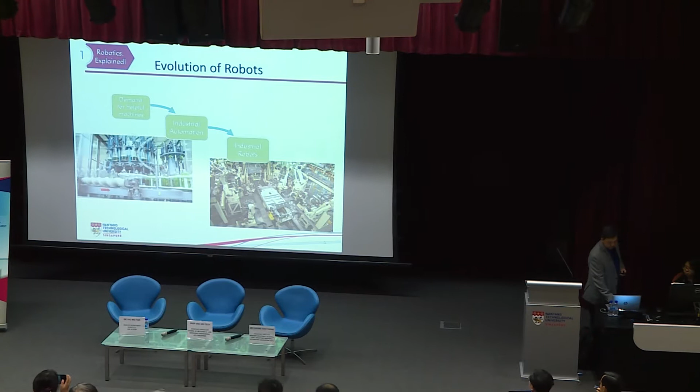First is the demand for helpful machines. We need that, and then we have industrial automation. We build machines, and that leads to industrial automation. As we progress, we think hard manufacturing isn't good enough, we need flexible manufacturing. And there we go, we have robots building cars. So that's in earlier years.

As we go on, the spin-off from industrial robots will be service robots. One type of service robot is field robots. Field robots include robots that go underwater, on land, in the sky, and into space. These are what we call field robots.

Service robots also mean medical robots. Anything outside of the manufacturing floor, we call service robots. So medical robots - we have robots for surgery, and robots to do rehabilitation for, say, stroke patients.

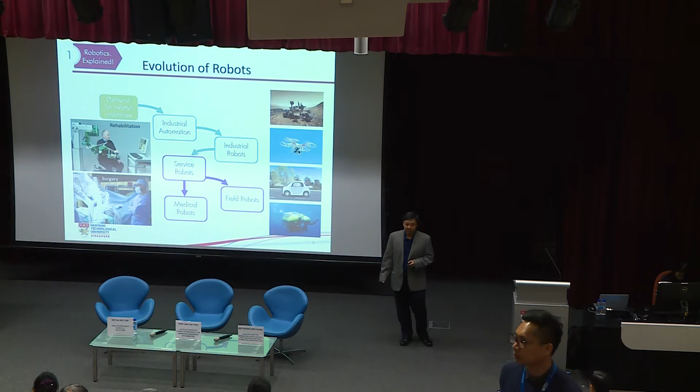We also have social and domestic robots. For example, robots for social interaction, for the elderly, for dementia - more therapeutic kinds of interaction. We also have robots for entertainment, robots for education, so more social. And in the domestic space, we have robots for cleaning, sweeping your floor, for delivery, and robots for cooking. These are all coming into our lives now.

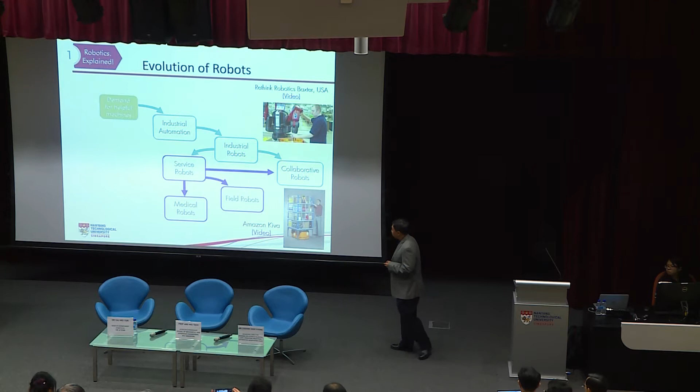As this progresses, the merger of service robots and industrial robots gives rise to a breed of robots called collaborative robots, or cobots for short. It's been a buzzword in the past few years - I'm not sure if you've heard of it. So what is a cobot? Cobots are robots used mainly for industrial applications, but they allow people to work alongside the robot. In the olden days, industrial robots were heavy and powerful, so they were always caged up, and people weren't allowed into the robot's boundary for safety. Cobots, on the other hand, are designed to work alongside human beings. There are several features that allow this.

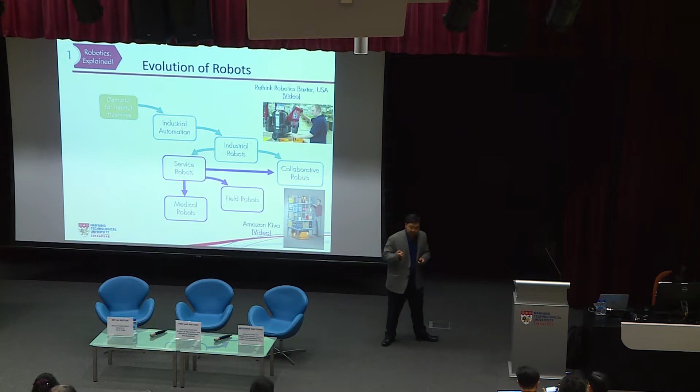Let's take a look at two robots here. Let me bring us to YouTube.

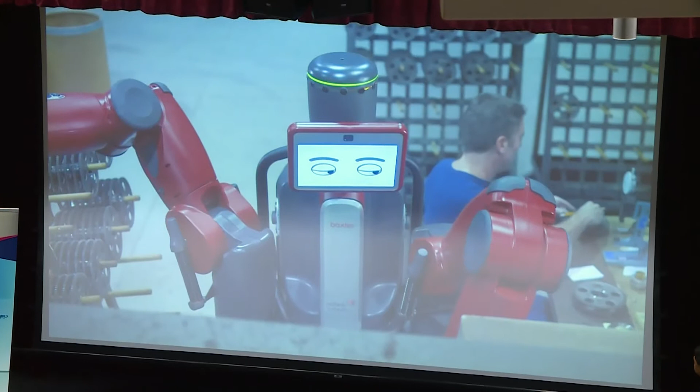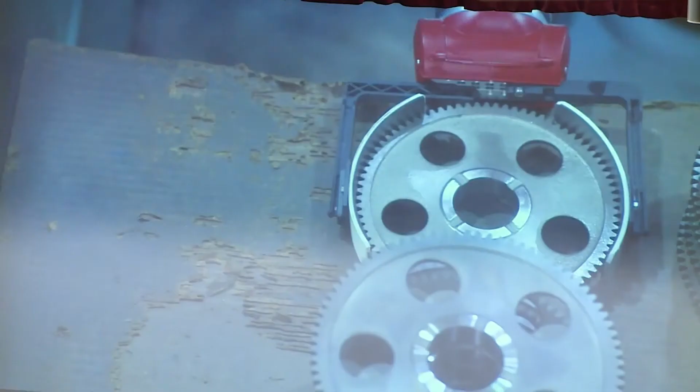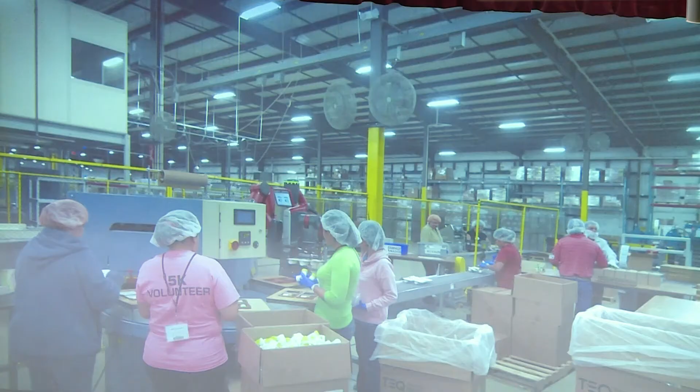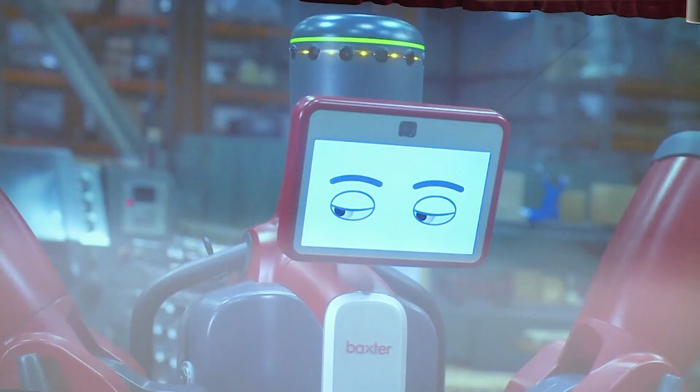Think adding automation to your production line limits you to high cost, high volume, caged robots. Think automation requires specialized robots programmed by highly trained engineers. Well, think again. Baxter breaks out from the protective cages that contain many manufacturing robots, allowing people and robots to work side by side, doing what each does best. From machine tending to line loading to packing and unpacking, Baxter has the flexibility to be deployed and redeployed on tasks with minimal setup or integration cost. Whether there's increased customer demand or the introduction of a new product, Baxter helps you create a collaborative workforce, one with increased productivity and efficiency. Think about getting all this for a base price of $25,000 - that translates into an ROI of months, not years. Now think about what Baxter could add to your plant. Rethink manufacturing. Rethink what's next. Rethink robotics.

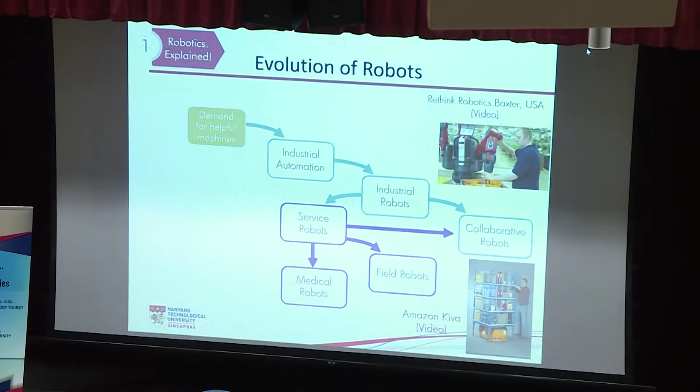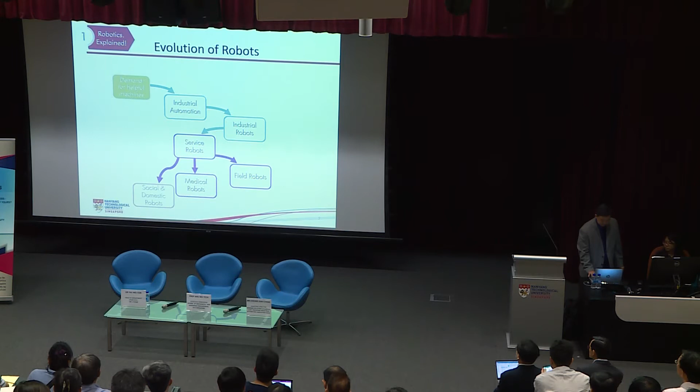We better go back first, if not this thing will rerun again. Right, so, am I still on?

So that's one type of collaborative robot. It allows the robot to work alongside a human being. The main design feature is that the joint is no longer hard - hard meaning that when it hits someone, the full force of the power gets transmitted from the robot to the person. But the joints of cobots are usually variable, meaning the joint can become soft the moment it touches a human being, so contact with the robot is no longer harmful. That's one big characteristic of a cobot.

So there's another type of cobot, one with no arms.

On the ranking of things to worry about, Skynet coming and taking over doesn't even rank in the top 10. It distracts attention from more urgent things, like what's going to happen to jobs.

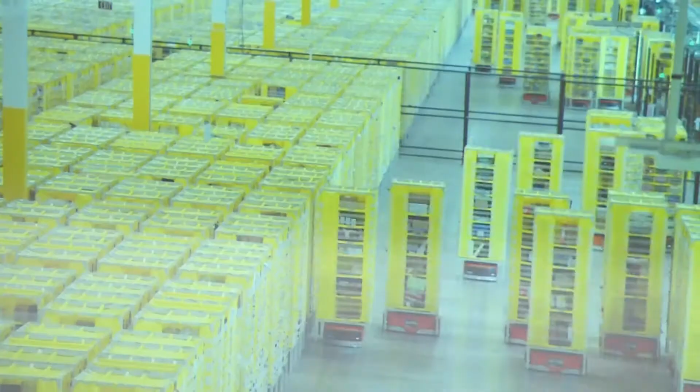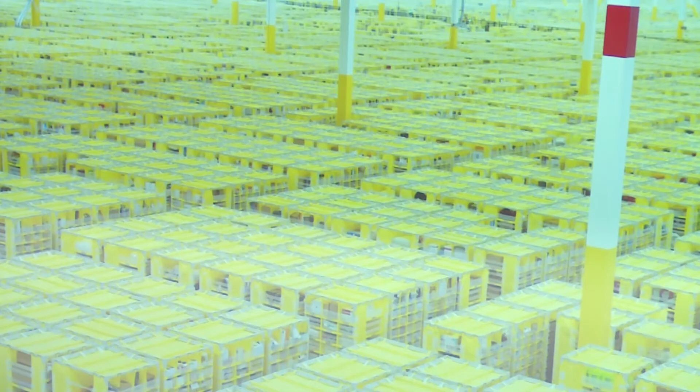For a glimpse into the future, consider one of the largest companies on the planet, Amazon. Amazon has tremendous scale. We have fulfillment centers as large as 1.25 million square feet, like 23 football fields, with millions of products. To deal with that scale, Amazon has built an army of robots.

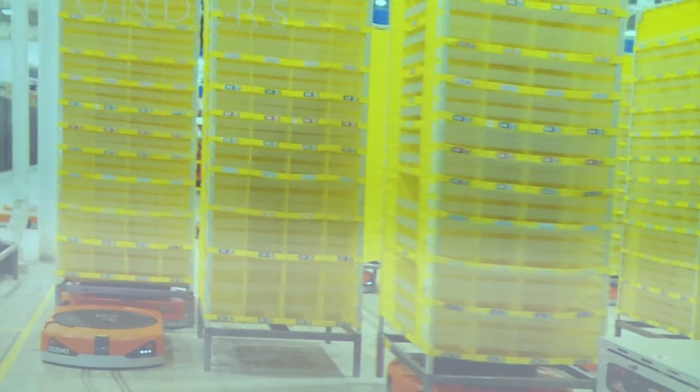Like a marching army of ants that can constantly change its goals based on the situation at hand. Our robotics are very adaptive and reactive in order to extend human capability and allow for more efficiencies within our own buildings. And there's plenty more where those came from.

Every day, this facility in Boston graduates a new batch of machines. You get the idea?

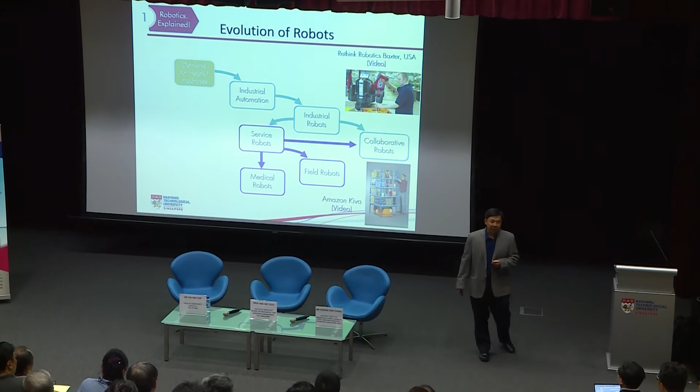In fact, Amazon did not build the Kiva system. They purchased it from a startup company for $775 million, so that they can take the technology off the market, so that they are the only people that can use this technology.

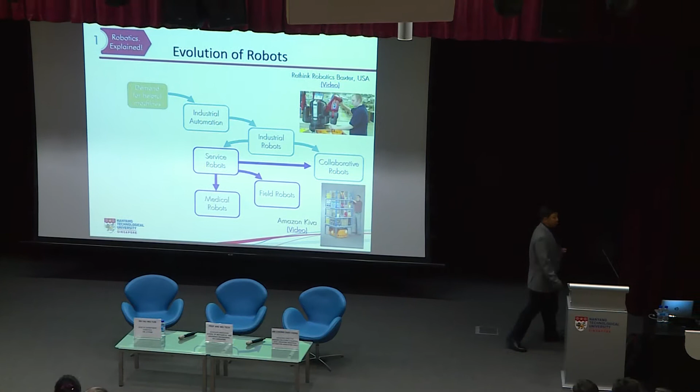So you can see, robot work alongside human beings. So that's cobots. There's another track of development that's also from the human desire to replicate nature.

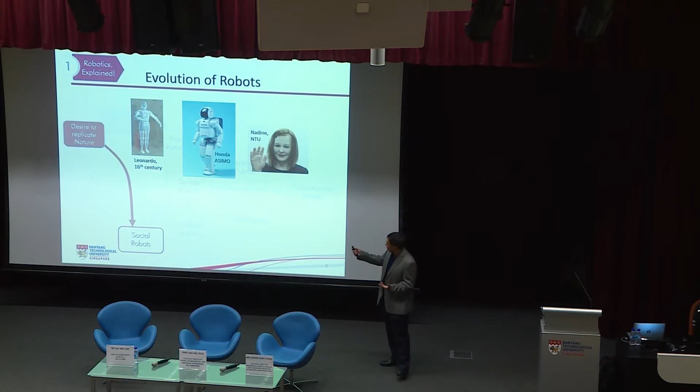Leonardo da Vinci built a robot-like thing. Honda was the first one to build a successful Asimo. And then we have our own NTU invention here, Nadine, which is a humanoid robot aimed for being a receptionist. We also try to mimic nature: flying machines, ants, Big Dog by Boston Dynamics.

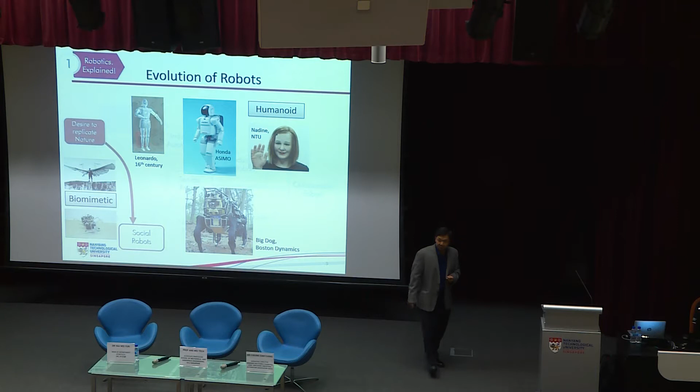Right, so this would be the development of robots. The recent development, the latest one, is this thing called bots. So no longer is the robot in a physical form.

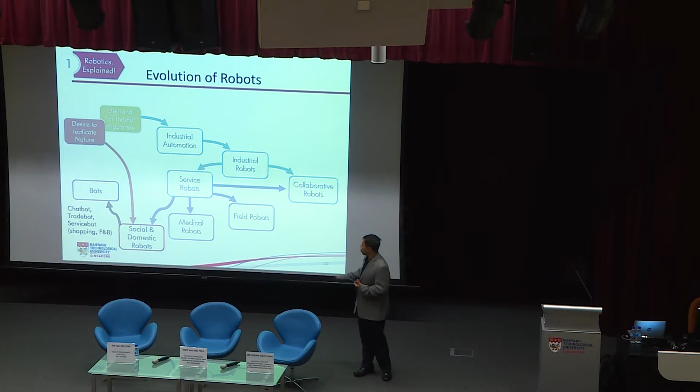People think that a bot is a software robot, on the internet, a software system that's intelligent enough to chat with you, to trade. Trade bots can trade faster than any human trader, at a million times the speed of a human trader. So for very quick trading, people use trade bots. Service bots for shopping, for F&B. So these are all robots.

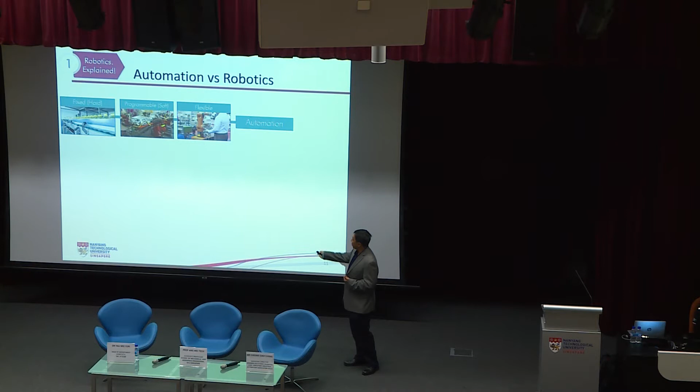So then you ask, what is the difference between automation and robotics? In a traditional sense, this is fixed or hard automation, programmable automation, and then with cobots we have flexible automation. On the other hand, this is industrial robot, this is collaborative robot, this is service robot, this is social robot. In fact, we call this robotics.

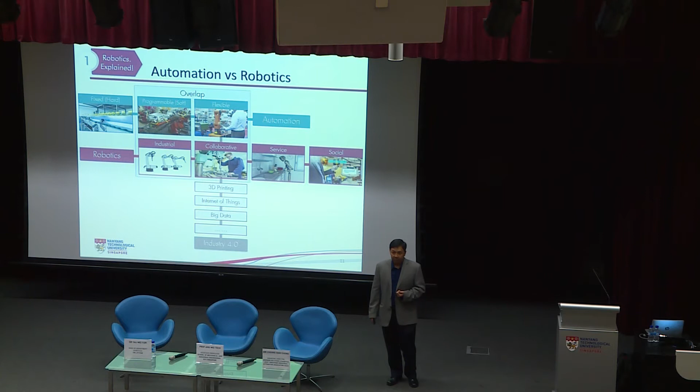In fact, this is the overlap—these are equivalent, and these are equivalent. And on this axis, if we add 3D printing, Internet of Things, big data, and integrate them together, it's the whole concept of Industry 4.0. This talk is not about Industry 4.0, but robotics is part of Industry 4.0.

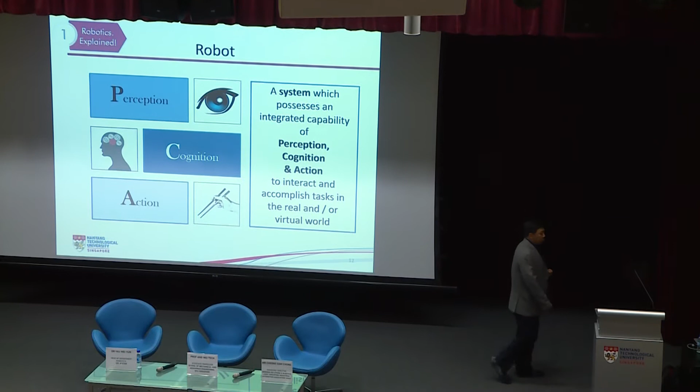How do we define a robot? Because now software can be a robot, right? A robot is a system which possesses an integrated capability of three things: perception, cognition, action. You get information in, cognition means you try to understand—you interpret the data, you make a decision, and after that you take action—to interact and accomplish tasks in the real world or the virtual world.

So we have broadened the definition of what a robotic system is all about. As long as it possesses the three components here—perception, cognition, and action—in general, we can classify that as robotics technology.

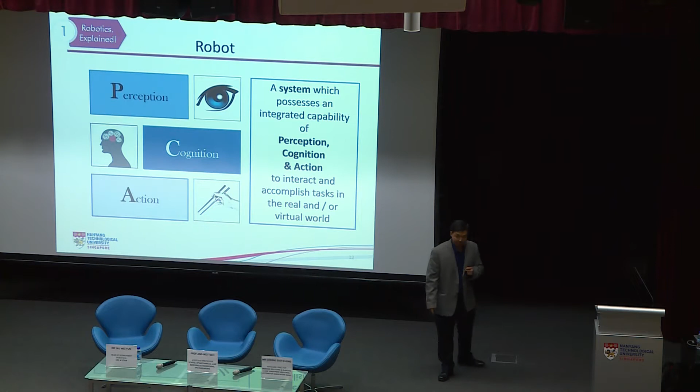So we zoom in a little bit more. Perception: sensors, how to use different sensors, computer vision, how to use sensing. The sensors means the hardware, sensing means the software. You make sense of the sensing data.

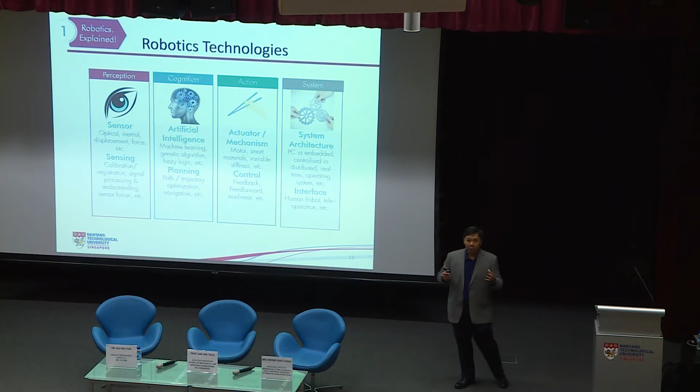Artificial intelligence, machine learning, genetic algorithms, fuzzy logic—all these things are the buzzword right now, AI, to make decisions. Planning, actuators, different types of smart mechanisms, smart materials. How do you do control and put everything together? How do you design the system to be robust? The interface between human and robot is what makes cobots possible. So these are the building blocks of robotics technology.

Before we go on, I wish to spend some time talking about artificial intelligence, AI. This is basically the idea that robots and AI are going to take over the world. So let's zoom in on what AI is. AI is, by definition, intelligence demonstrated by machines, as simple as that. But what exactly is it? So can I ask the audience about intelligence—human intelligence—can I poll the audience?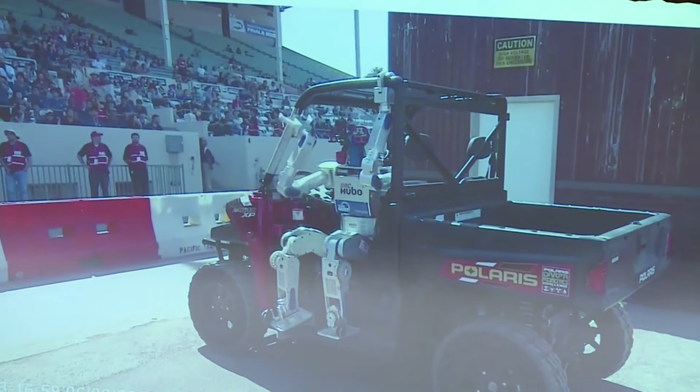Let's see what they did. The robot's supposed to get into the car and drive it to the destination. All these tasks are told to them, but the size of the car, what route to drive, are not told, so they must make the decision to do the driving.

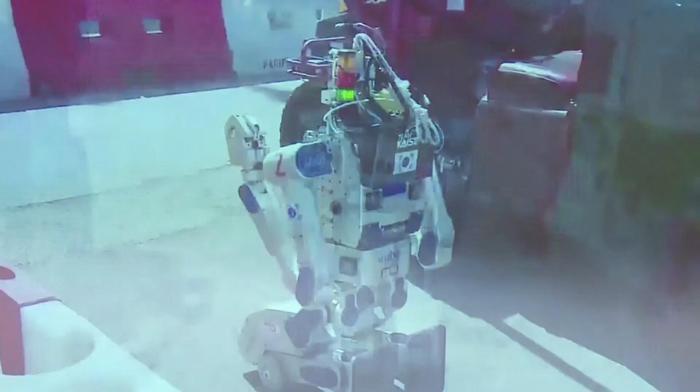Get out of the car, kneel down - not to pray, but it's easier to move on wheels. They're supposed to look for the door, look for the handle, using computer vision to detect where it is, then open it, manipulate it, and go in.

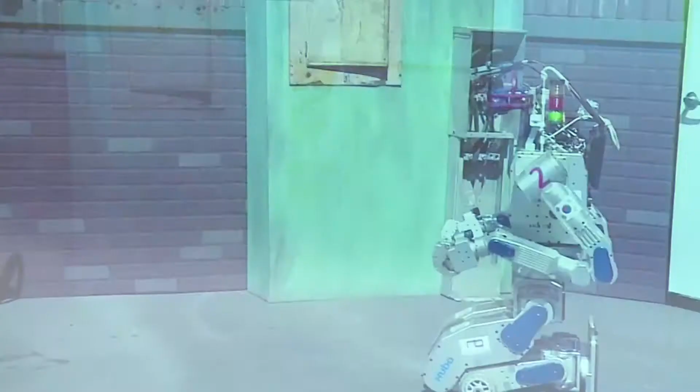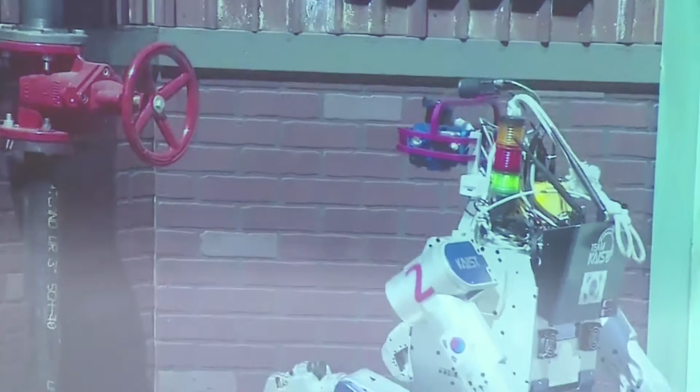Then they must find the first task: find this red valve, turn the wheel automatically. They must find the task - the task is given to them, but where it is, the height, the sequence, is not told to them. The robot must make decisions on the spot.

Find the right tool - it takes a long time to decide. Pick the right one. Not sure why it does that - regrip again. This is planning, they are doing planning now, so that it can grasp the thing correctly.

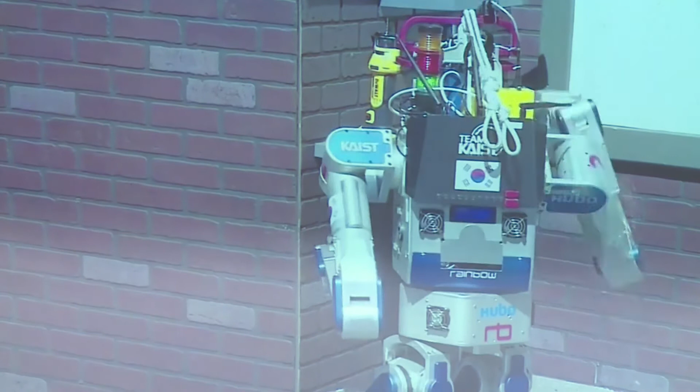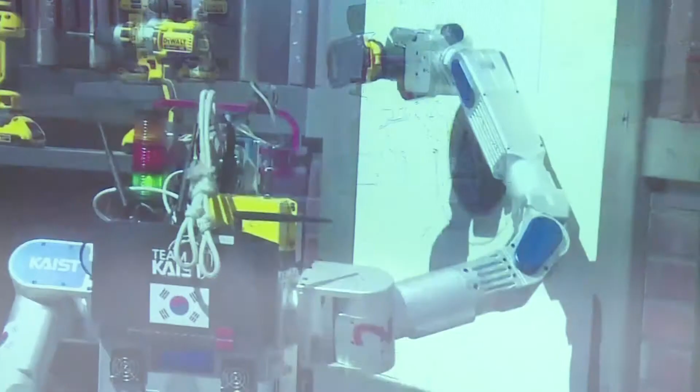Find the target - it's looking for the target now, sensing the depth. Turn on the drill or the saw, then cut out the circle. See that the circle is really round - rounder than any of us can do. All right, done.

Next one: to pull the cord out from one socket. It's looking for the right way to approach - it gets somewhat lost trying to find its way. Find the target task, raise to the height. This is, I think, 4 times the speed or something like that. Pull out the cord.

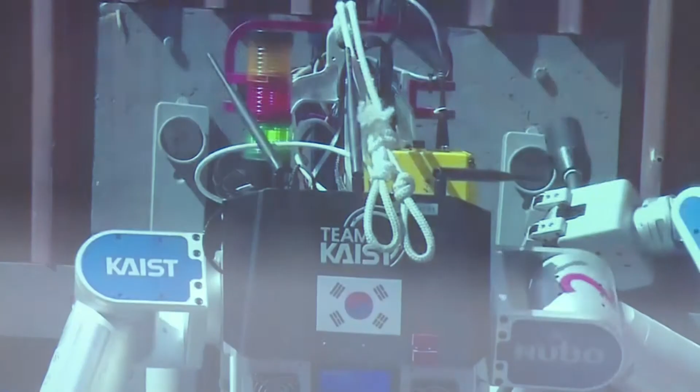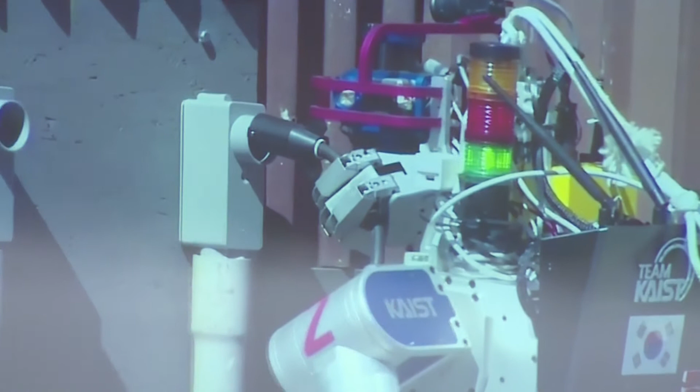The task here is really hard because the cord is flexible - this is manipulating a flexible, deformable object, which is really difficult. It adjusts, tries again - cannot, because it's flexible. It gets lucky, pushes the thing in. Done.

Other groups say that they are cheating. They're supposed to take the other path to walk over.

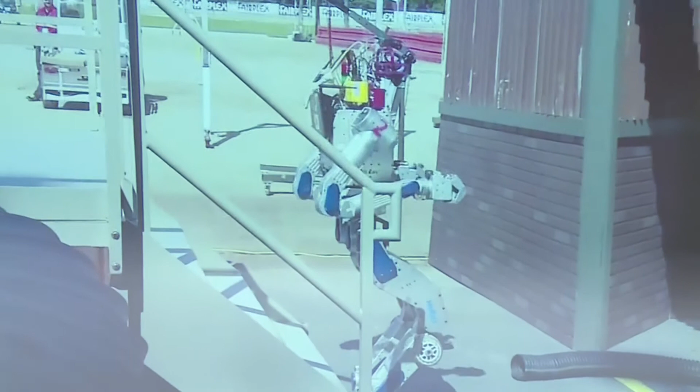All right, coming to the end, push away the obstacle. Come to the stairs. See, this robot is designed to be no front and no back. It doesn't matter front and back. So it's doing planning now, adjusting itself, doing planning, how high, calculate the dynamics of how to approach the stairs.

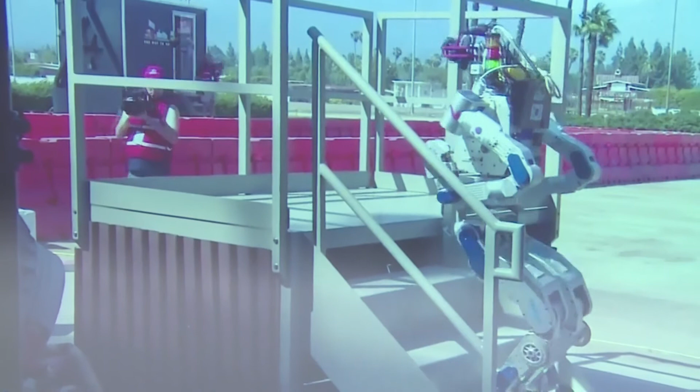All right, and then go up. And once you've taken the first step, it knows the parameters. The rest are easier. And voila, it finishes. It's the only one in that year that accomplished everything. So that's why they won.

One month after the competition was held, the magazine called Popular Science declared that the DARPA Robot Challenge was a bust, was no good at all, that it was a waste of time. So let's see why.

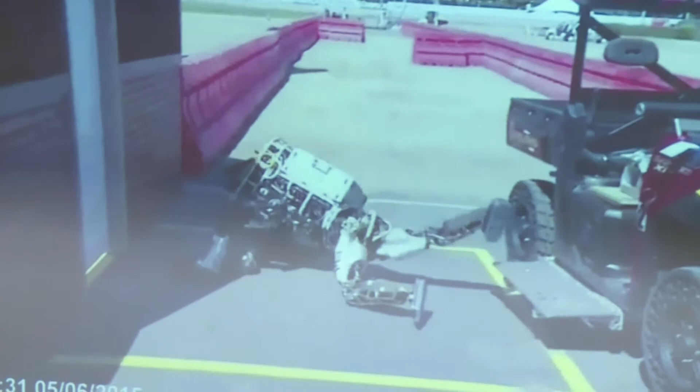Not too good, right? Not too good at all. You say that it's busted. That's 2015. That's what the best in the world can offer.

Hubo, why did Hubo win the competition? It's not because Hubo, in terms of robotics engineering, was the best. Hubo won because the KAIST team behind it adopted the best strategy, right? I was there in Korea playing with Hubo, with Professor Oh, the team that built this thing.

That day, they did a demo, the robot kept falling down. One of the sensors was out of calibration, right? It kept falling down, couldn't take even one step. So the technology is not that robust.

And why did they win? Because all the major decision making was done by the team behind. The rule allows them, I think, 100 bit per second kind of communication. They can send a simple signal over to the robot to guide it.

And the CMU team, the red robot that fell down, spent 10 minutes looking for the door handle that day because it was too bright. The vision algorithm was not tuned to that brightness. So the robot spent 10 minutes looking for the door handle.

But Hubo was simple. The team behind it said the door handle is there, go there. All right, so immediately the robot made a decision. The decision, remember, between the obstacles, to bash through or walk through, the team behind made the decision for the robot. It's too unsafe to walk through, let's just bash it through. So it was the strategy behind it that won the day for them.

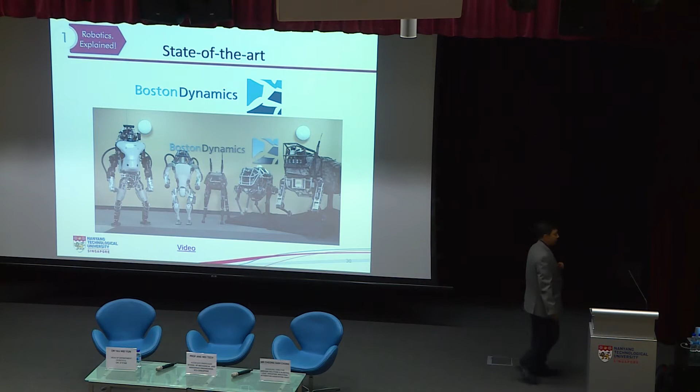All right, so that's 2015. Let's fast forward a little bit to see what the best can offer now, in 2018. Boston Dynamics.

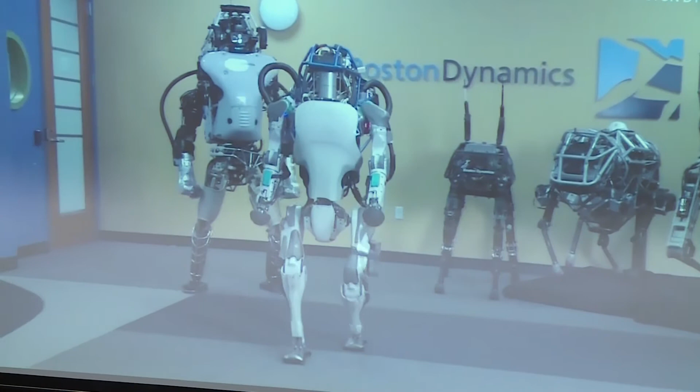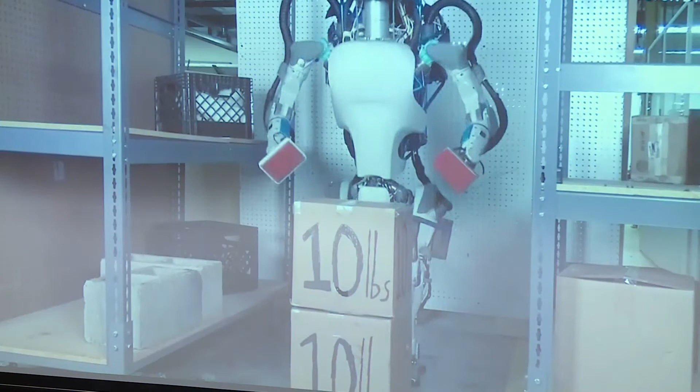Here are some of the terrifying robots from Boston Dynamics. This is Atlas. Boston Dynamics calls Atlas the world's most dynamic humanoid robot, and from the looks of it, they're absolutely right. Atlas is a bipedal robot capable of running, jumping, doing backflips, and keeping its balance like no other bipedal bot we've seen before. Its control system coordinates the motion of its arms, torso, and legs, allowing it to perform human-like tasks and achieve whole body manipulation.

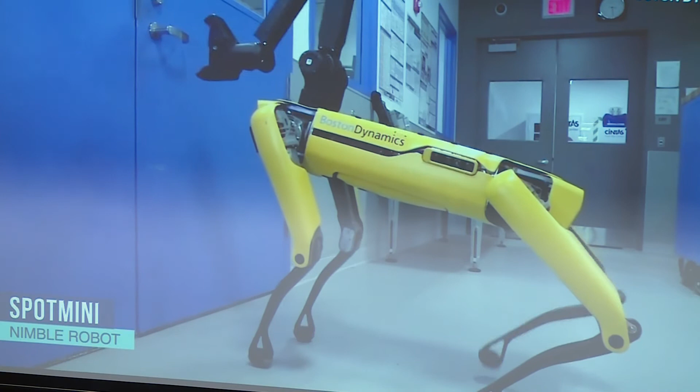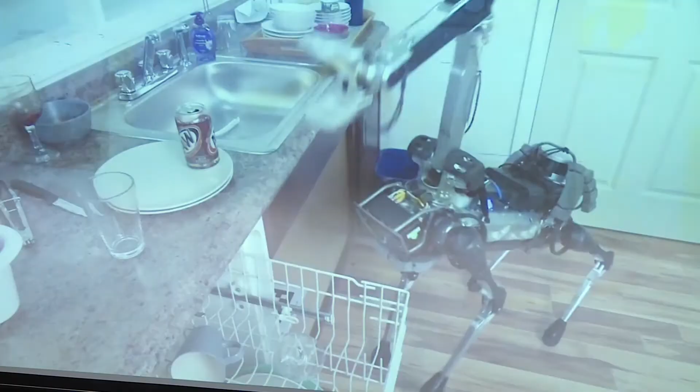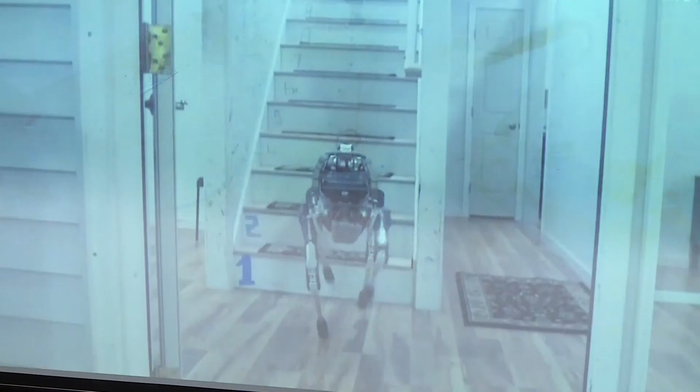Spot Mini is a dog-like robot that is small enough for domestic use. Its arm, which looks like a mini brontosaurus's head, can pick up and handle objects around the home. Spot Mini is 100% electrical, making it the quietest robot Boston Dynamics engineers have built to date.

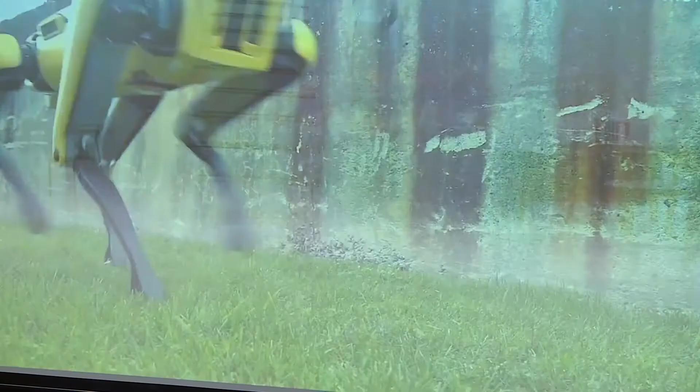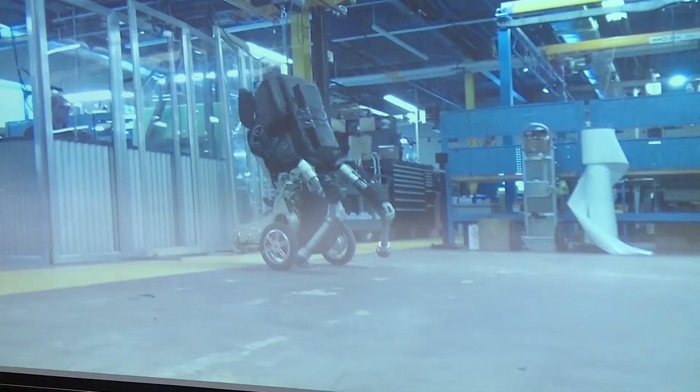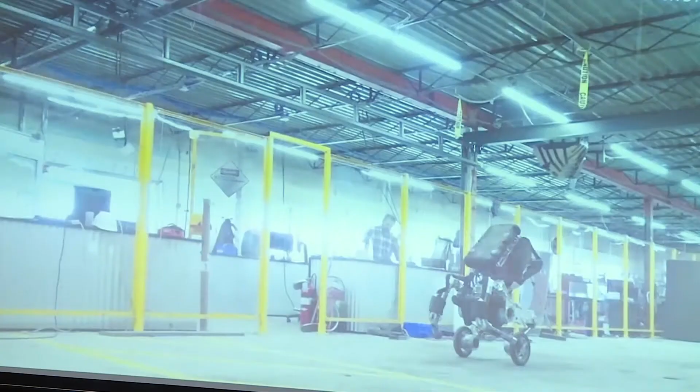Handle gets around on 2 legs and 2 wheels. It's a very agile and high-strength robot. Its wheels allow for high speeds and quick movements. It has the ability to jump over and even use objects like a table as a platform or track as it glides on its wheels, maintaining its balance. Handle's grips are great for picking up heavy objects and moving them around. Handle uses its handles for balance, as demonstrated here in this endpoint control demonstration.

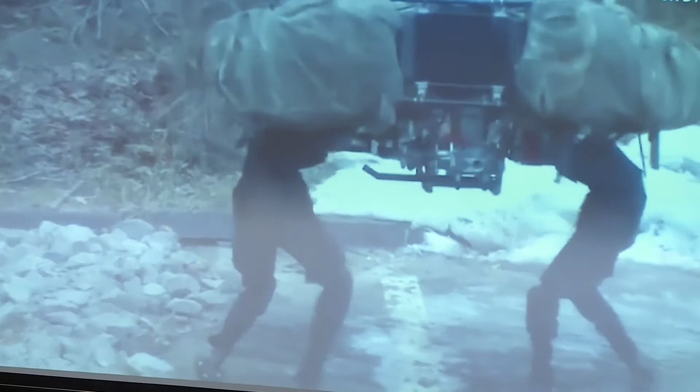Big Dog was one of Boston Dynamics' first advanced terrain robots and was the first legged robot to venture outside the lab, taking on some real-world conditions. It was designed to perform well in different environments. It can carry up to 150 kilograms and can climb slopes up to 35 degrees. Big Dog was developed for the military, who passed on the rugged robot because it was too loud.

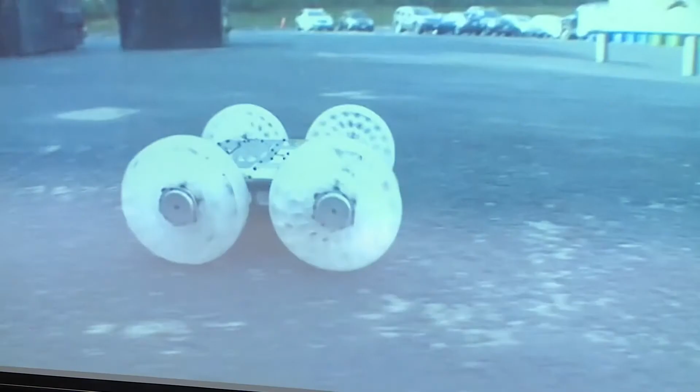Sand Flea is like a small RC car. Don't be fooled by its small stature though. Sand Flea can jump 10 meters into the air. It can literally leap onto the rooftop of a building, landing softly. Think of it as a high-end RC car.

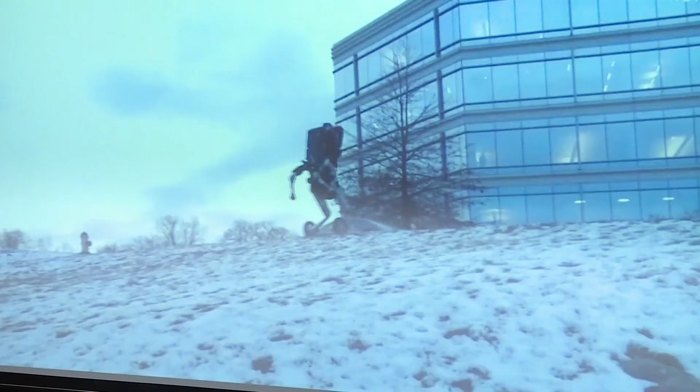Don't worry, it's okay. I think it's okay. Is it too loud, the video? Don't worry, I don't think I have many more videos.

So you see that capability in terms of control has been enhanced, definitely better than any of those robots that we've seen in 2015. It's amazing, right? A robot can do all these things, but all these are well-rehearsed tasks. The robot picks up something 10 times, perhaps the success rate is maybe less than half. All these are for video production. It's not that robust yet.

Boston Dynamics was purchased by Google in 2013 at an undisclosed sum, with markets saying probably around 800 million. But Alphabet, Google, sold it to SoftBank last year, said to be around 600 million, at a loss of 200 million. Why? Because none of this technology can be monetized. How do you make money out of all these things? The thing is very good for show, right? Capability-wise, it's marvelous, but to make it robust for the real world with AI behind is still a long way to go. So what it demonstrated is that we have done very good control in terms of dynamics. We do the calculation well, and we are there already.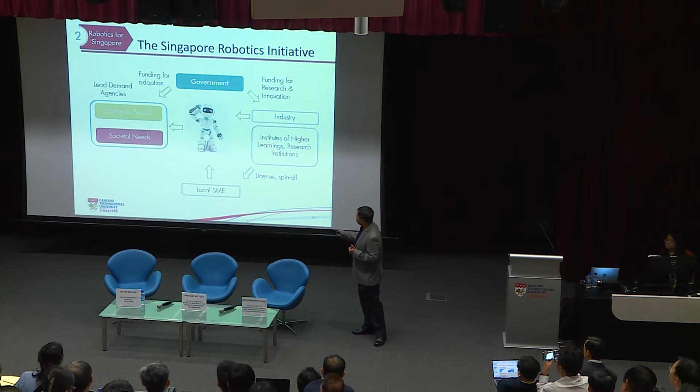Maybe they can license this and make the local SME stronger, provide a solution to fulfill these needs. The government, on the other hand, can fund adoption by lead demand agencies - government agencies, like hospitals facing a manpower crunch.

Let the hospital adopt locally produced solutions - I give you money to adopt. SMEs say, now government guarantees my business when I invest in this, so let me invest, because SME cash flow is very tight. With guaranteed sales, I invest, I license this, I build this, government pays for the bill, and after this is tested and trialed, they give me money and feedback to make it better and stronger.

So if we pick the solutions correctly, Singapore has national needs, and at the same time, these needs are ahead of other countries. If we can do so, in time to come we can export these solutions, level up our SME with capability that leads the world, and solve our national needs. It's a very good strategy.

Don't you think so? It's very sound. This is the same thing we do when we have needs - our water needs. We created NEWater, we created water technology, and now our water technology leads the world. So this is the same template we embark on for this solution.

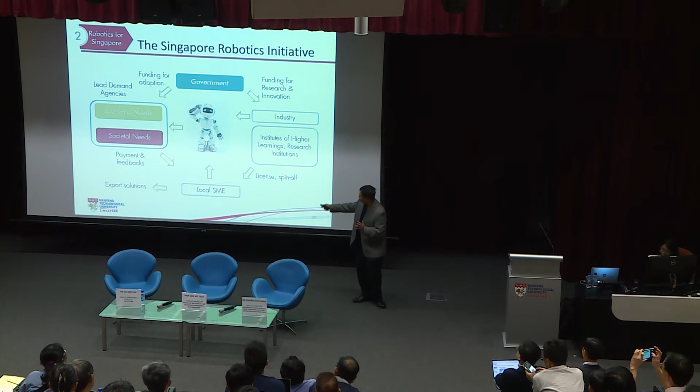In order for us to fulfill what we described here, the government came up with 3 strategies. The first one: develop class-leading technology and research capability. Research performers are the IHLs, research institutions, and Singapore-based companies - we develop world-class technology.

Then, lead demand-driven: we use LTA to drive the use of autonomous cars, hospitals to drive the use of hospital logistic robots. Lead demand drives the development of robotic solutions. Technology is custom-built into solutions and delivered here.

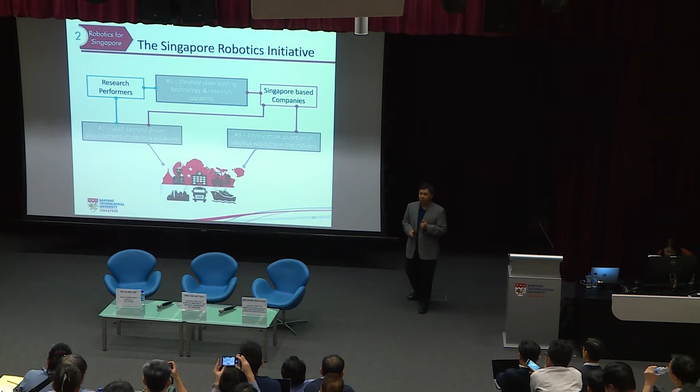And then they fund the industry to adopt the solutions. Three-pronged strategy: develop technology, build technology into applications targeting the needs, and then fund people to adopt. Again, this is a sound strategy.

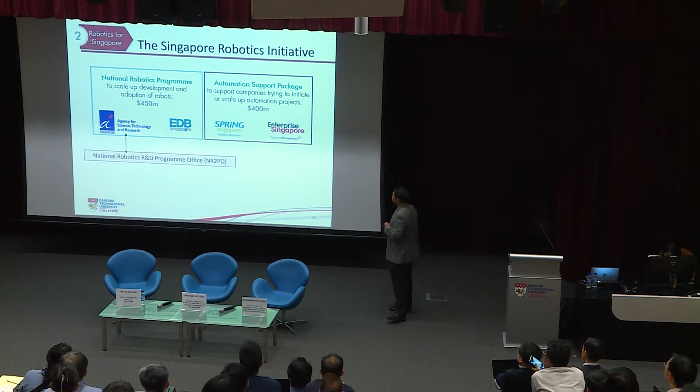Then we set up the National Robotics Program, $450 million to start, led by EDB and A-STAR. The National Robotics R&D Program Office, NR2PO, is housed under A-STAR to lead this effort. At the same time, we have the Automation Support Package, initially by Spring Singapore, now Enterprise Singapore, for people to adopt.

For NR2PO, they came out with the strategy for number 1 and number 2. Number 1: they're trying to build robotics-specific, domain-specific R&D programs, with EDB leading manufacturing and logistics. How do you build a solution? How do you adopt a solution?

These are the lead demand agencies in the public sector: LTA leads transport, NEA leads environment, MOH leads healthcare, and Homeland Security and Defense leads security. This was in 2015, and in 2018 they added construction. This year, construction was added. So this is lead demand - government says I need this solution, you build it, I pay. Then this will go on an upward spiral.

So everything falls under them. Now let's recap - we have 3 strategies here. But there are gaps, even though the strategy all looks very nice. Singapore government is always very smart, the top level always comes up with very good strategy. But the problem is always the devil in implementation.

Our middle-level people, the government agencies, always fall short. Mostly our complaint is against the government, but in fact we should complain about the agencies. The government just takes the blame for the agencies. So first thing first: adoption.

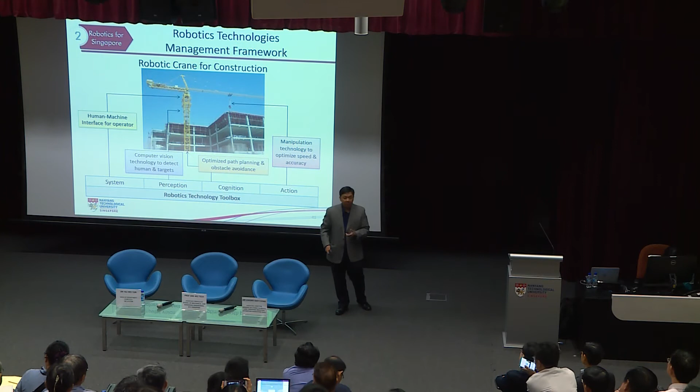Can you imagine Boston Dynamics having to rebuild from scratch every time they build something? No - the capability builds up, version 2, version 3. Ours is restart, restart, restart. It is time that we rethink how we should approach this problem.

Driving innovation, another gap - there's no provision for startups at all. The part of the sector with the highest innovation is startups, but yet there's no provision for startups. I spoke with the chief of the National Robotics program, and he said that's not my issue, you talk to Enterprise Singapore. At that time it was Spring Singapore - so I spoke to Spring.

Spring said not my problem also. The boss didn't say that we need to do all these things. So there's no provision as well.

There's only Singapore with a national robotics program without funding startups. You go and see the rest of the world, Japan, China, Taiwan, everybody has this thing to push startups, because startups are where the next unicorn is going to come from, not from SMEs. It's going to be startups. And then there's a mismatch between government schemes, not good enough, poor investment ecosystem here.

Time's running out, so I need to catch up a little bit. Stolen jobs. Let's go to the jobs now. What are the jobs that are being endangered by robots?

Clerks, different types of clerks, right? Receptionists, information officers, bank tellers, bank officers, vehicle drivers, manufacturing workers, logistics workers, fast food cooks, not your chef, not a celebrity chef, fast food cooks, retail salespersons and cashiers, telemarketers, security guards, construction workers, farmers. These are the jobs. Is your occupation there?

Feel scared now? Can it be replaced? Most likely not. I guess, if I guess correctly, most likely your occupation is not here.

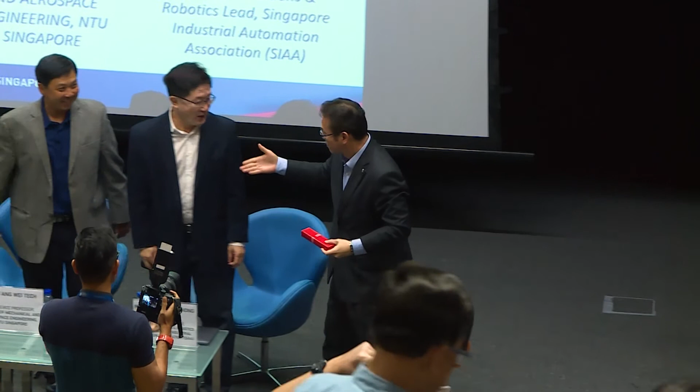Thank you, John, there you go. Okay, one, two, and three. Can't wait. Thank you, thanks, okay thanks a lot. Sure, thank you.